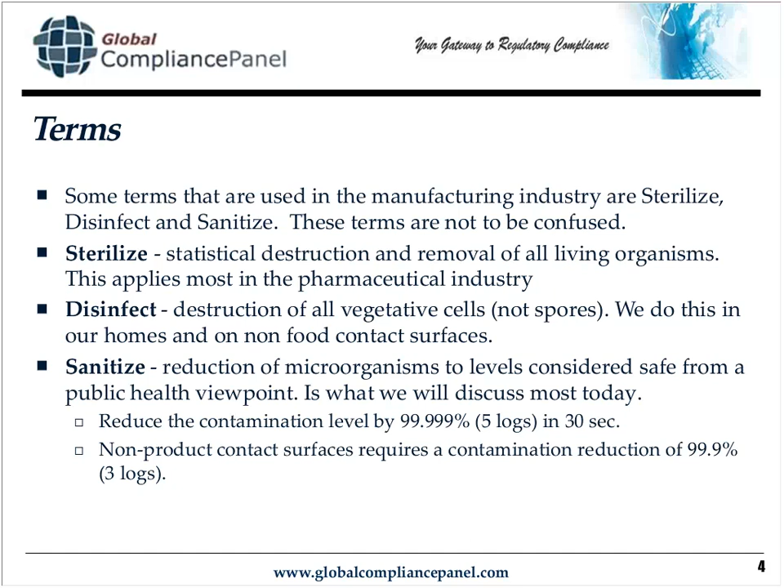Again, what we're looking to do with sanitation is to reduce microorganisms, not totally eliminate. That's not necessary, and it's actually not even helpful because most of the microorganisms that exist in the environment, as you know, are non-harmful and actually outcompete the harmful bacteria. So we want to keep some of those bacteria in the environment to outcompete and to prevent explosive growth of pathogens or potentially dangerous microorganisms, those that are involved in foodborne illnesses.

So now that we've defined sanitizing and sanitation, let's talk about that versus cleaning. Cleaning is closer to disinfecting, wherein what we're trying to do is on a food contact surface, we want to free it of bacteria that might contaminate products and ingredients, causing foodborne illness. But those areas that are just near the food contact structures, we want to also sanitize and clean so that they're not a source of contamination.

But non-food contact surfaces just need to be clean and free of buildup. So we don't want to have a biofilm or a layer of protein or starchy material that would harbor or cover bacteria such that when we go to clean, we can't actually reach them with our chemicals or water.

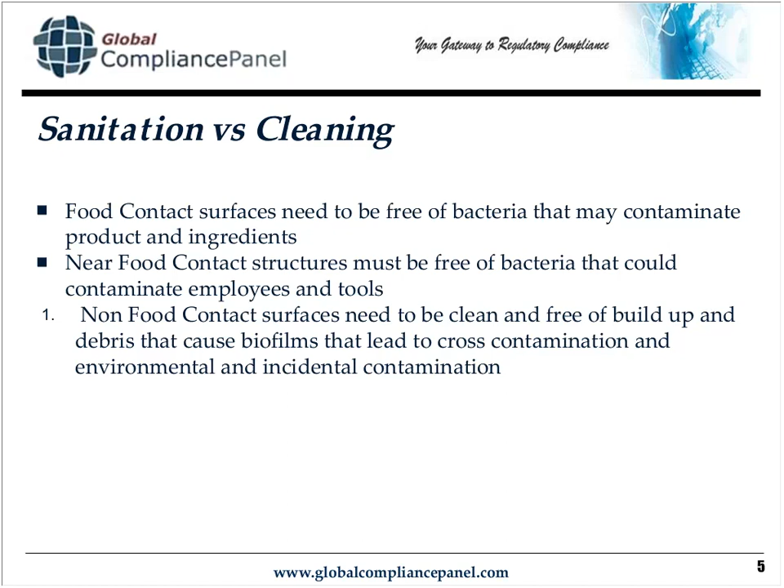Or we want to prevent any incidental contamination. And again, so what areas do we want to sanitize? Let's list them. They're going to be our food contact surfaces, like processing equipment that has direct contact with food, our tools, anything we're using like spatulas, scrapers, tongs, anything that moves the food or comes in contact with the product needs to be sanitized.

Near food contact surfaces, very important. Support equipment, nearby structures or shields. Say, for instance, if you have a Lexan viewing screen, overhead structures, refrigeration units. Say, for instance, if it's a spiral freezer or a refrigeration unit that's bringing down product temperatures, it's a cooling tunnel. All of this, including the HVAC systems or refrigeration systems that support it, and forced air used to convey product or used to blow off excess water.

All of this needs to be sanitized because it does, in fact, come in contact with the food either directly or indirectly, as in the employees who are working with the food come in contact with these structures. Say, for instance, you have inspectors on the line and they are pulling out defects of pieces of shrimp. They will touch these supporting structures and then touch the product.

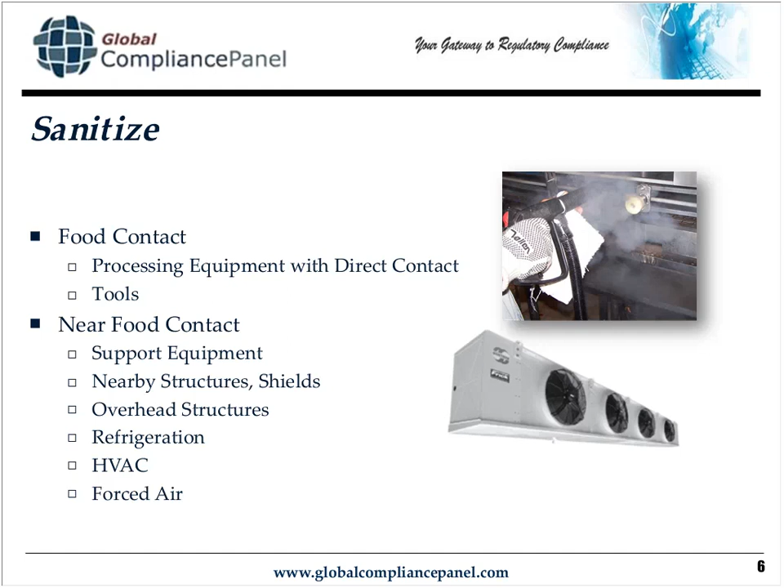Now, cleaning, on the other hand, is what we want to do with non-food contact surfaces, things where we have a reasonable level of control that neither employees who haven't cleaned or sanitized their hands nor the product itself will come in contact with. Walls, ceilings, drains, floors, racks, and cleaning equipment should never be in contact with food, so all we need to do with these items is to clean them.

Any food that does come in contact, conversely, with these systems or with these items needs to be discarded because, again, we haven't sanitized them, we've only cleaned them.

Additional areas where we're going to perform cleaning would be the break rooms, locker areas, office areas, and restrooms. Again, these are totally non-food contact areas, areas where employees, after going to these places, should wash, sanitize their hands, and perform whatever types of protective clothing changes need to happen in order to ensure that they're not bringing contaminants back into the food contact area.

So two-pronged there. Not only do we want to clean these areas, don't need to sanitize these areas, we also want to make sure that our program recognizes that these areas are cleaned and not sanitized, and therefore when we traverse between each of these areas back to the processing area, that we take protective measures to make sure we sanitize ourselves where we're going to be in contact with food, wearing gloves, washing hands, using sanitizer or hand dips.

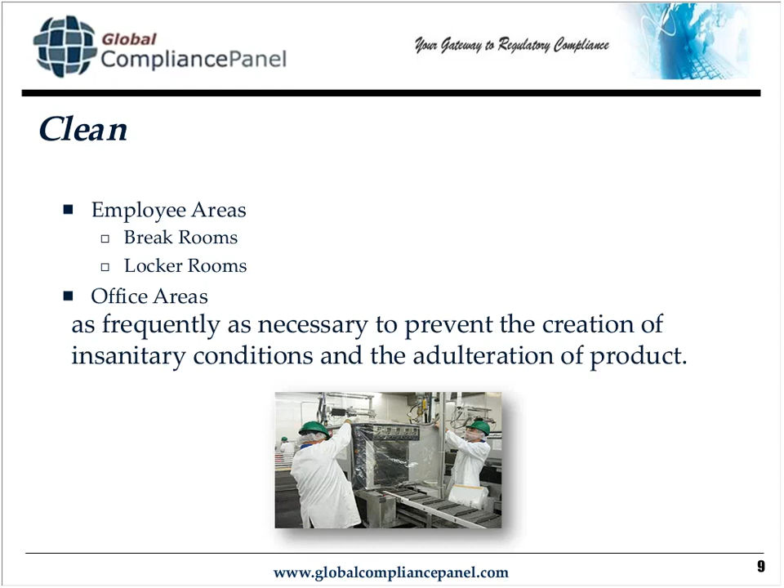Not only that, but foot dips, because as we walk through the facility, we don't want to bring any extra bacteria into the processing area that could potentially be splashed onto support structures. So now that we know the difference between sanitation and cleaning, let's talk about why we do these things in more detail.

The 9 CFR 416.1 of the general rules requires that we have sanitary operations. All food contact surfaces, including food contact surfaces of utensils and equipment, must be cleaned and sanitized as frequently as necessary to prevent the creation of unsanitary conditions and the adulteration of product.

Purposely, this is very broad and general. What is intended by the Code of Federal Regulations, or CFR, is that each facility or operation take responsibility for keeping their product safe. So all food contact surfaces is the statement here, as well as preventing the creation of unsanitary conditions.

So here you notice it hasn't mentioned that anything has been contaminated. It just says that the condition for an insanitary environment should not even be created. So here there's a very broad regulation to make sure that this facility itself is taking ownership of maintaining proper conditions.

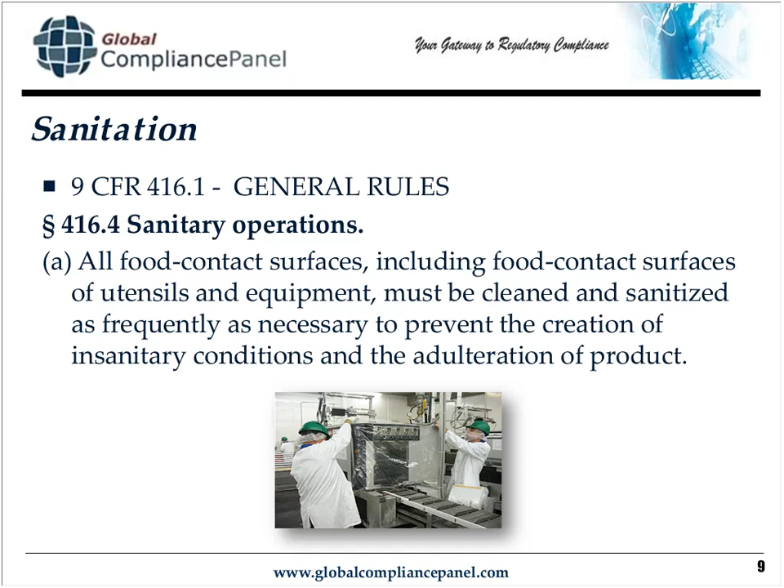What are we talking about in terms of food contact surfaces? Let's review. We're talking hand sinks, pans, utensils and tools, so scoops, spatulas, anything used to move products around within the process, also equipment. You'll see here in the picture that we even have forklifts and bags of product.

Keep those things in mind too as you're working and looking at your sanitation program, that anything that comes in contact with food or the people that come in contact with food, there needs to be a program or a plan in place in order to prevent that cross-contamination. In this particular example, separating the people who deliver the product to the mixing area or the processing area from the people who actually handle the product is the best practice.

I also recommend that pallets, as you can see in this picture, there is actually a wooden pallet being delivered to the deck where product is going to be mixed. That's definitely not a best practice because those pallets have traveled, as you know, through many different environments.

And unless they're dedicated just to product which is brought to this mezzanine or mixing area, they have been in contact with animals and pests and dirt and different transport equipment, as well as people who are not food handlers. So there's a lot of potential for contamination involved with pallets and shrink wrap and overwrap that's being delivered to this mixing area, as well as the hand jacks themselves are being handled by warehouse employees who are not direct food contact handlers.

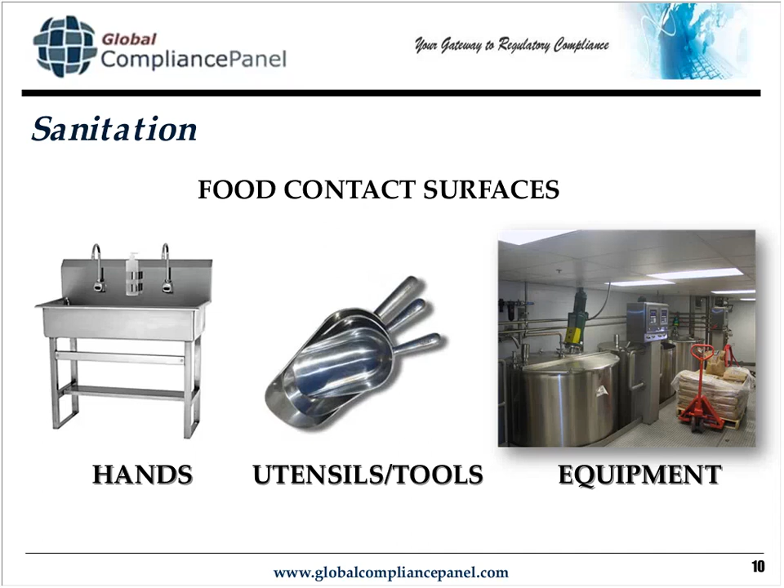Going back to food contact surface cleaning and sanitation, we talked about the Code of Federal Regulations and its definition of the program needing to have sanitation occur as frequently as necessary. A good rule is every 4 hours because we know that the bacterial life cycle is 4 hours. And if we are able to clean, say, mid-shift, end of shift, routinely, then we know that we have a good program in place that would be defensible in any situation to combat bacterial growth.

If you're working with non-potentially hazardous foods, dry goods, or acidified foods, or things that are shelf-stable, then it's not as critical. But anytime you're working with meats and produce and potentially hazardous foods, it's really important that there be mid-shift cleanups where we are able to remove product that has accumulated during the processing so that it's not growing and harboring bacteria and imparting that onto the surfaces of the equipment itself.

Another tactic to use is maintaining the room temperature below 40 degrees. This is often used in the protein meat industry as a control so that any time that there is product exposed or product stored, the room temperature is maintained at a refrigerated temperature so that any product which is in that area will continue to be maintained at less than 40 degrees, or below the bacterial growth threshold.

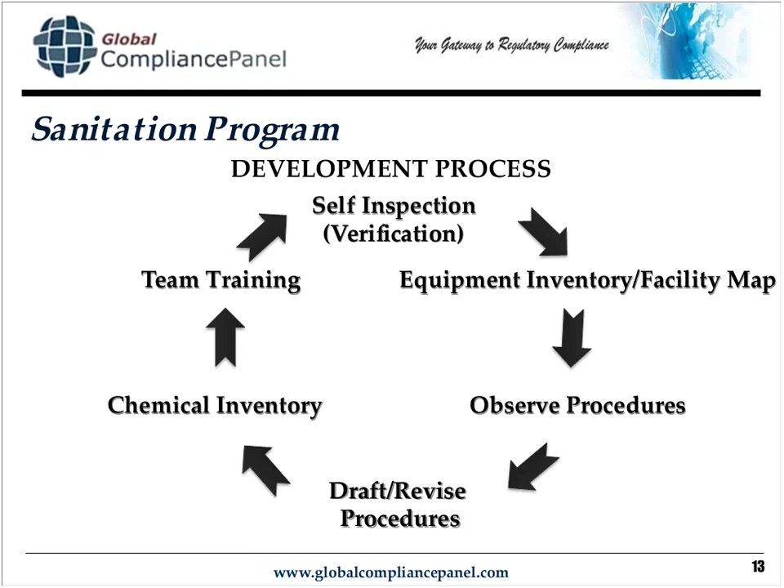And what would that documentation look like? Here is an example. We always want to use document control and demonstrate that by our header tables that kind of give an overview of what's involved in the plan. So we're going to define the area being addressed. We're going to have a checklist of each task being completed.

We want to make sure we include accountability and include a step for verification. So someone who is a supervisor is going to sign off that not only has the documentation been completed accurately, but the procedures have been effectively completed.

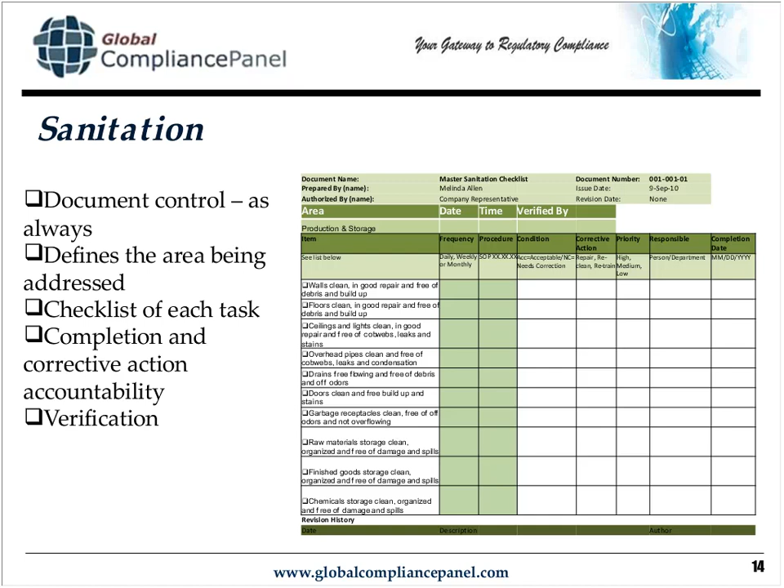Within those procedures, sanitation is always going to have the same 5 steps. You're going to remove any debris, product residue, anything, equipment that is loose or portable. You're going to apply cleaning chemicals, scrub surfaces so that, again, we remove any biofilms or hang up areas where there is residual product. We're going to rinse away both the cleaning chemical and any of the loosened materials, and then finally apply our sanitizer.

Keeping in mind that after the sanitizer, there is no rinse step. We want the sanitizer to remain on the equipment to continue the bacterial kill. And we will talk as we go through about how we prevent any chemical contamination with that as our process. Why don't we want to rinse the sanitizer away? Because remember, our water supply, while it is potable or safe for eating, it is not sanitized. Our water supply is not free of bacteria. And if you rinse away your sanitizer, you're removing your protective chemical and possibly introducing other bacteria.

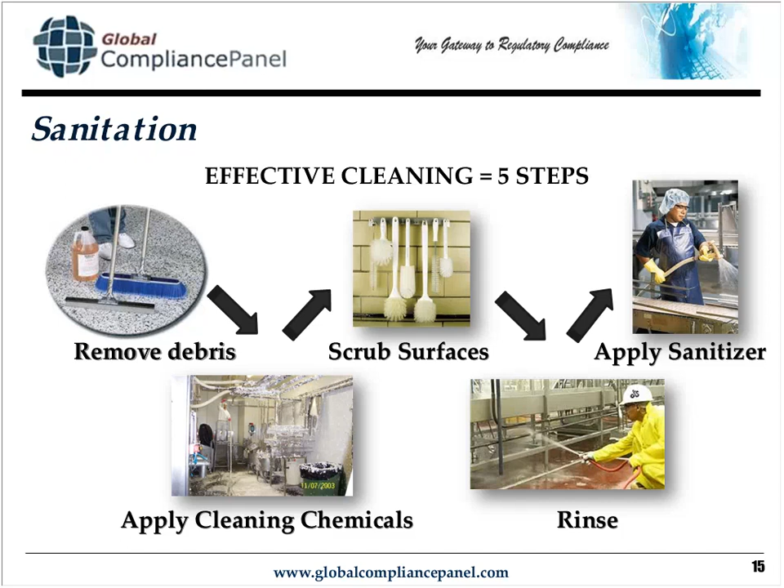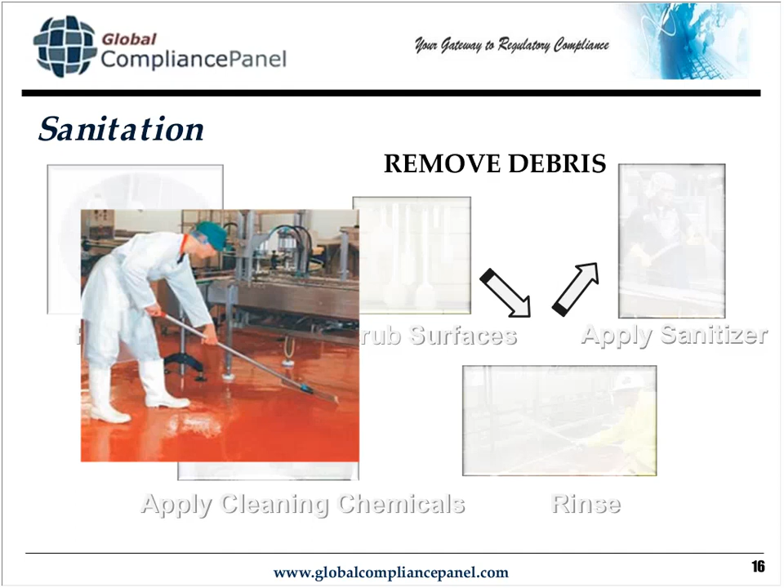So this is just walking us through the process. Again, this is more important than most of what we'll talk about, just making sure that we get all these steps included and in the proper order and done in detail and effectively. So removing any debris, because again, we can't clean if we have residual biofilms and debris or product residues. Applying the cleaning chemicals, and as you can see, plastic covers over, of course, our control panels or any exposed electrical equipment.

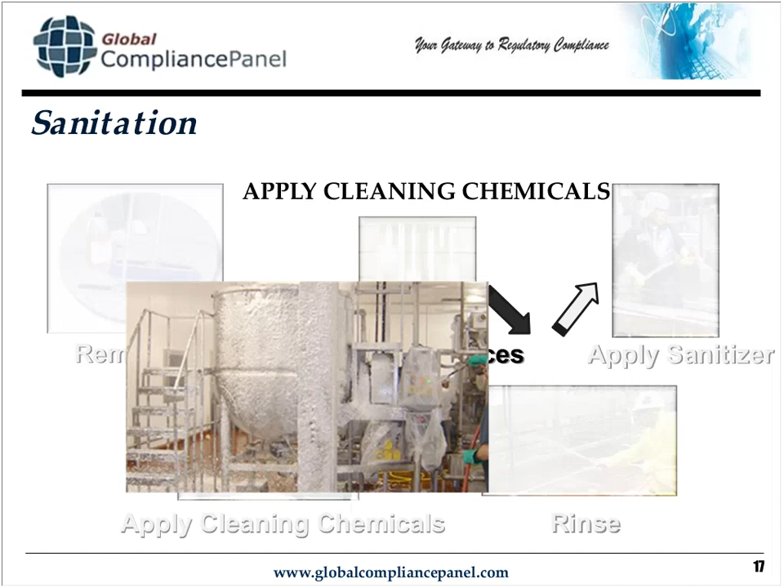And you also see how the support structures, such as the stairway, the stands that the mixers are sitting on, everything is receiving cleaning chemical. We start from the top. We apply in a downward motion so that any debris or everything that we're trying to eliminate is moving towards the floor. And then we start with our scrubbing. So now we want to make sure that the cleaning chemicals are in contact with all the surfaces and that our, again, residues are being removed. Just spraying on the cleaning chemicals is not necessarily going to allow us to remove the buildups that have accumulated during the processing. And we'll talk more in detail about what types of ingredients are more stubborn and require more of this scrubbing.

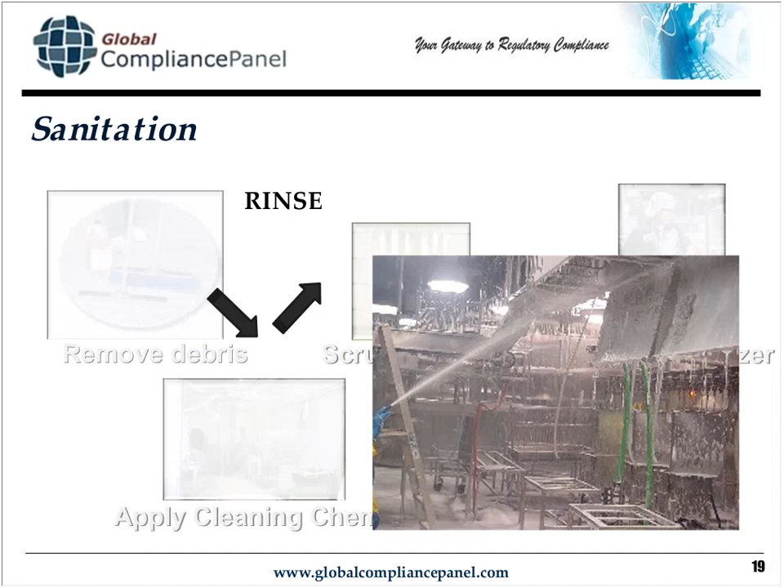Then we have our rinse step, same as our application of cleaning chemicals. We're going to start from the top and move our way down so that everything moves towards the floors and drains. And finally, we apply the sanitizer to clean and rinsed surfaces. Always remember that you cannot sanitize a dirty surface because there will be a biofilm that will trap bacteria underneath, wherein the sanitizer won't actually be able to contact the surface of the equipment. And bacteria will continue to grow underneath that biofilm until it is exposed again to the product contact surface.

Now let's focus on cleaning. So we've got all the equipment, food contact surfaces sanitized, but we also have all those peripheral structures that we talked about earlier. Now this type of cleaning we would want to do before we sanitize, but typically needs to happen less often than sanitation. Sanitation is going to happen every time we run products, again, because this is most critical and it is the law. Cleaning all the other non-contact surfaces, usually there's less, we're not having products contact these surfaces, so it's less likely that they're going to get built up in dirt.

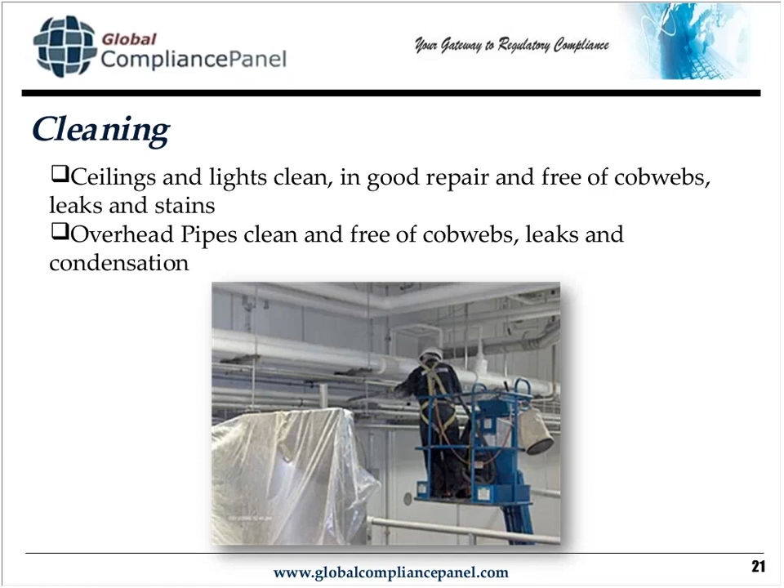Then moving to the floors, the same, they should be clean and in good repair, also free of debris and buildup. And drains being free-flowing and free of debris and odors. Working backwards there, the odor is the indicator that we have some bacterial spoilage going on and that there is debris building up in the drains and that they're clogged in some way, that the debris is not flowing out towards our waste management.

That also prevents us from keeping our floors free of buildup and debris, which a regular program of sweeping, squeegee, et cetera, needs to be employed, even during production, because we don't want to wait, especially if you're running 2 shifts, you don't want to wait until 16 hours later. Again, that's a lot of time for bacteria to build up as well as food debris, such that it makes the cleaning job a lot more difficult.

Which brings me to a really good segue that we want to always be sure that the program is at its optimum for the team to execute the procedures. So, for instance, we all know that anything in life, if it's difficult to do, it's not going to be done properly. We want to make it as easy for the team as possible. So oftentimes that means doing it more frequently so that it's an easier, smaller job than, again, waiting to the end when it becomes just overwhelming for the team member or beyond the scope of the time period that they have allotted to doing that task.

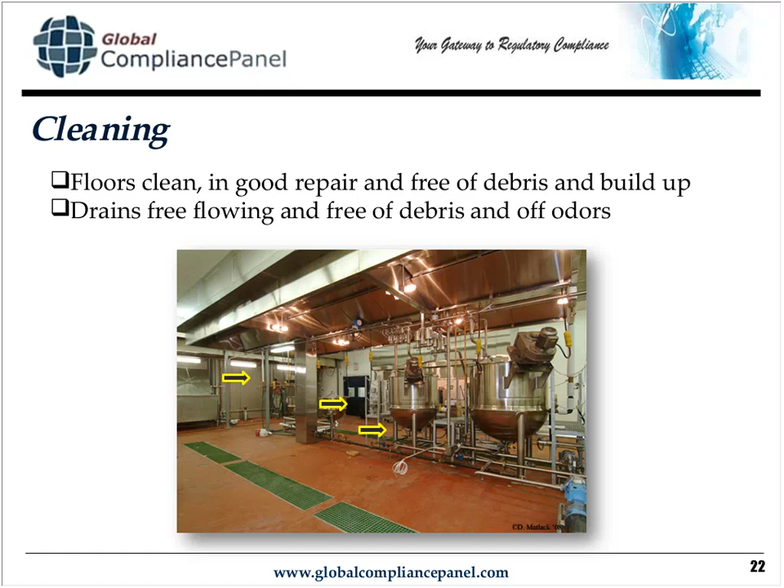And finally, floors being in good repair, same reason as for the ceilings. Anytime you have crevices, cracks, and divots in the material, it makes a good harborage point for the bacteria and makes a lot more uneven surface for our cleaning chemicals to act on, and you'll see what I mean as we go into the cleaning chemical effectiveness portion of the presentation.

Let's not forget our production and storage areas, that we want to include the walls. Walls tend to get a lot of contact and buildup, not only from our hands and the product that incidentally contacts it, but also we want to make sure that there's no insect activity going on the walls. I've even seen lizards run up the wall and leave excreta. So it's really important that we keep the walls clean and on the cleaning schedule. I know we put it on there sometimes and it doesn't actually get accomplished, but frequent cleaning and painting will keep that surface free of any potential contamination.

Again, it is a vector as opposed to a food contact surface. So how many times do we bump into the wall or touch the wall as we're moving through the plant and bring any contaminants thereon into other areas where they shouldn't be? Even more critical than the walls are the doors, because as you know, they get frequent contact. And anytime you're seeing those smudges on the doorway as well as on the door handles or door plates, you know that the cleaning program just is not effective. Those smudges are going to happen and they need to be a very integral part of the cleaning procedures.

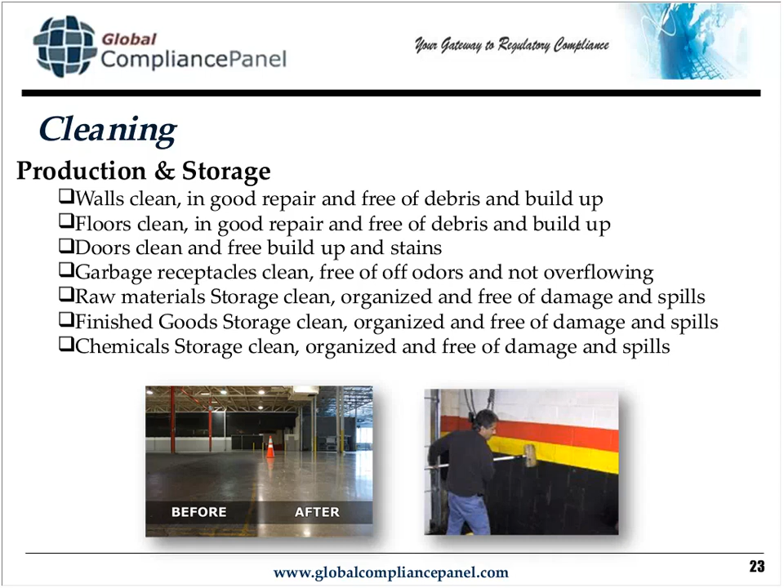Our final areas are the employee office and maintenance. Again, this is where we're trying to get to that last and most important vector, which is ourselves. So we want to make sure the areas that we work in or our office teams work in are clean and in good repair, free of debris and buildup, so that we're not a source of contamination as we move in and out of the production area or storage areas for whatever reason. Same thing with the walls, floors, ceilings, any overhead pipes and doors. We want them to be in good repair and free of cobwebs, leaks, and stains, as well as condensation and, again, buildup.

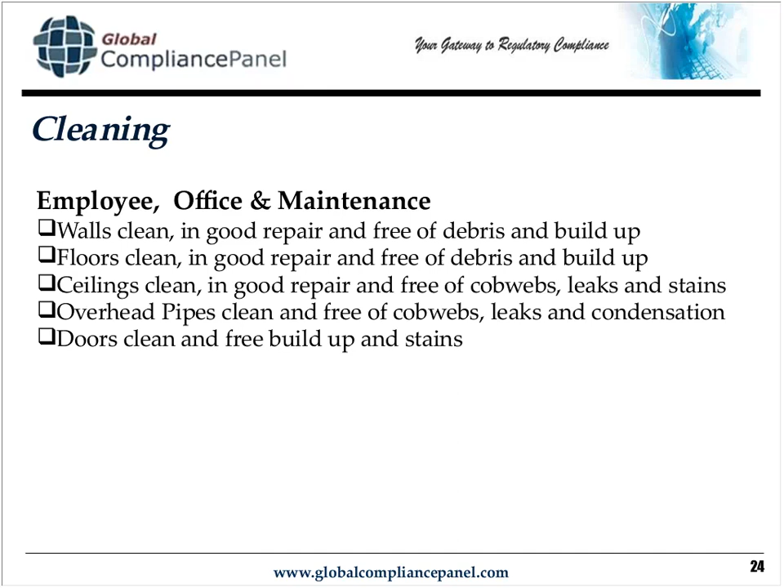One of the key areas I want to mention about the office area is computers and keyboards, mice, or any type of equipment or things that we handle on a regular basis, chairs, because again, our hands are the primary vectors for conveying microorganisms, so we want to have those on a regular routine cleaning schedule.

Exterior and grounds are also a good attractant; it's our first vein of attraction for pests, so we want to make sure that they are clean and in good repair. Any drainage prevents standing water or stagnant water from harboring or breeding insects and bacteria. Doors sealed and locked, just so that we control the flow of traffic in and out of the facility. Grounds are free of weeds, pests, harborage, and debris. For the same reasons as mentioned above, we want to make sure that there's not an attractant or harborage area for pests.

Equipment is stored away from the building or organized for inspection. That's another place where we might get rodents or insects to breed, and especially garbage receptacles. Our dumpster area, recycling, all of that needs to be, first of all, cleaned on a regular basis, and second of all, covered, so that birds aren't attracted to not only feed, but then to leave droppings, as they all do.

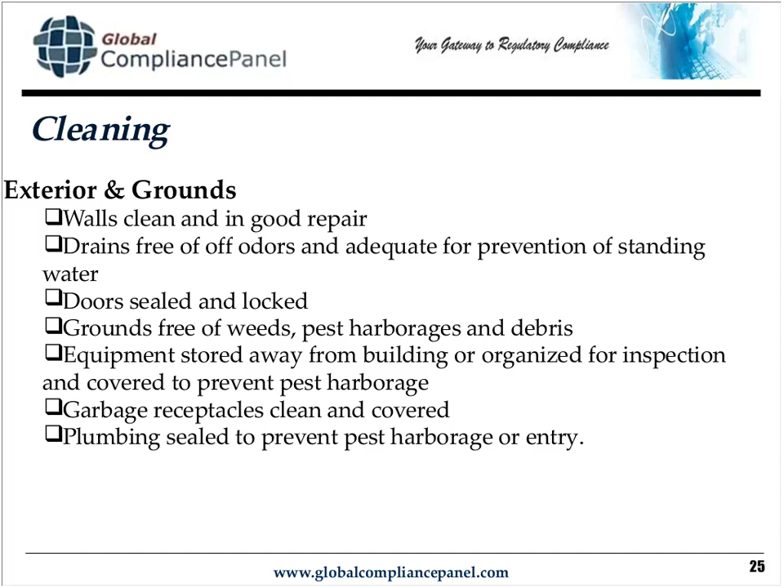And finally, plumbing. We're looking for it to be sealed or at least screened, so that pests that are on the outside of the facility stay there and don't enter in through our plumbing. Any holes in the structure of the building that allow pipes to enter, we want to make sure they're sealed, because they are a good transport valve for rodents and insects. They feel the warmth, they are attracted to the water, and they do what we call chase pipes from the outside and into the facility. So we want those sealed on the outside as well as sealed on the inside.

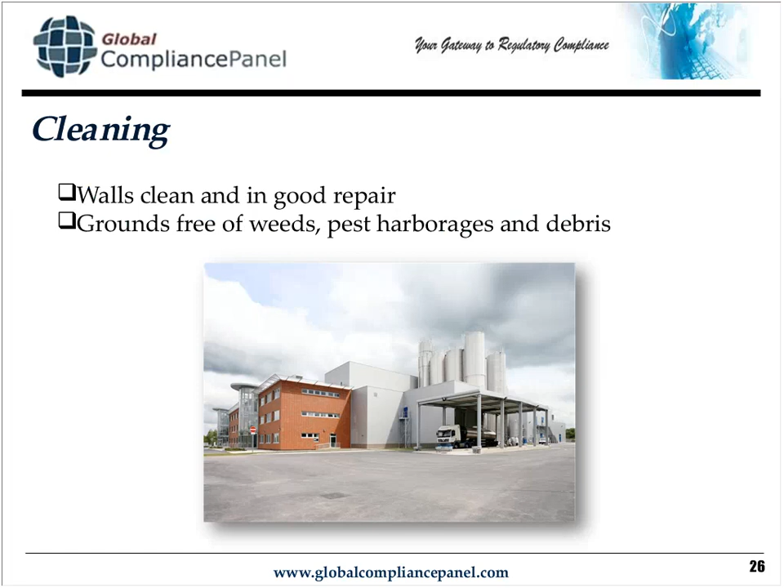And we talked about the external walls of the facility being clean and in good repair, as well as the grounds being free of weeds, pest harborage, and debris. A really critical area is our dock, because of all the truck traffic and the potential for product spills and the attraction of birds and other pests to that area. This needs to be on a more frequent cleaning schedule, potentially, than other areas of the plant.

Another area I want to mention is if there's external picnic or eating areas. That's another area where we could potentially have food that may be left around or wrappers that might attract pests. So again, keeping our cleaning schedule up to date so that it's effective may mean having a different schedule for different areas of the outside. So keep that in mind when you're doing your sanitation program or your cleaning program. Housekeeping is another name for it.

Here's a picture of a good-looking dumpster area, nice and clean and covered. Whenever they come to pick up the dumpster, the pad underneath is cleaned and repaired. And this is what we want our area to look like, such that it doesn't attract pests.

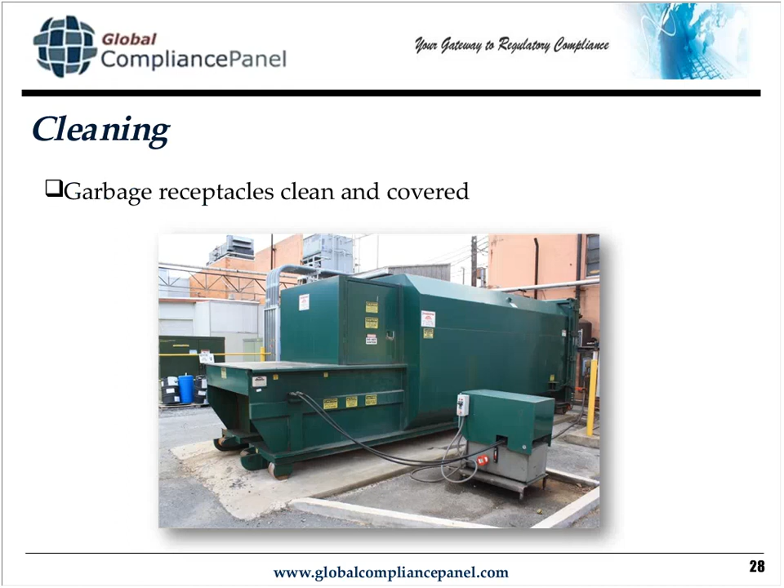Our warehouse area should be free of pallet splinters, food spills, mud tracks from the potentially wet processing area and out into the warehouse or refrigeration, cooling, whatever type of product storage area that we have. I see a lot of facilities that will have forklifts tracking water throughout the facility with a lot of dirt and potentially bacteria in it.

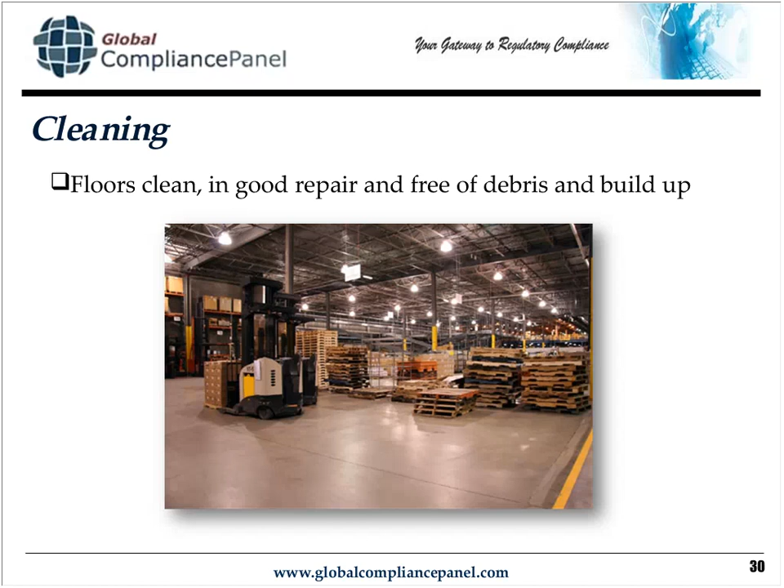We want to keep the ceilings clean, especially in the warehouse area. A lot of times, the ceilings as well as second layers of pallets and storage will drop debris down onto the top of ingredient and product, which then we know goes directly into the manufacturing area to be a source of contamination. So cleaning from the top down and making sure that there's not cobwebs, leak stains, debris will keep our food ingredient integrity intact.

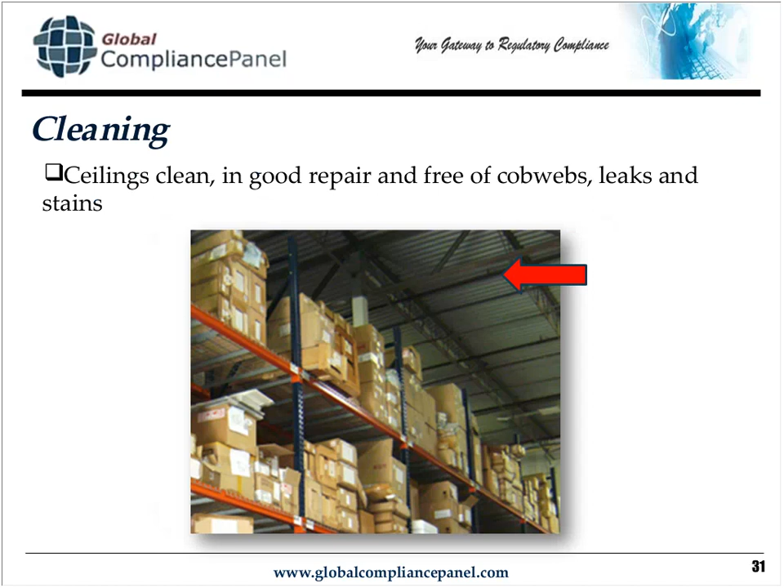Overhead pipes being a part of the ceiling. You know, you often get that buildup of dust and debris on the top of the pipes. Well, we know that if there's buildup here on top of the pipes, then the rest of that buildup went through the pipes and onto the surface of something.

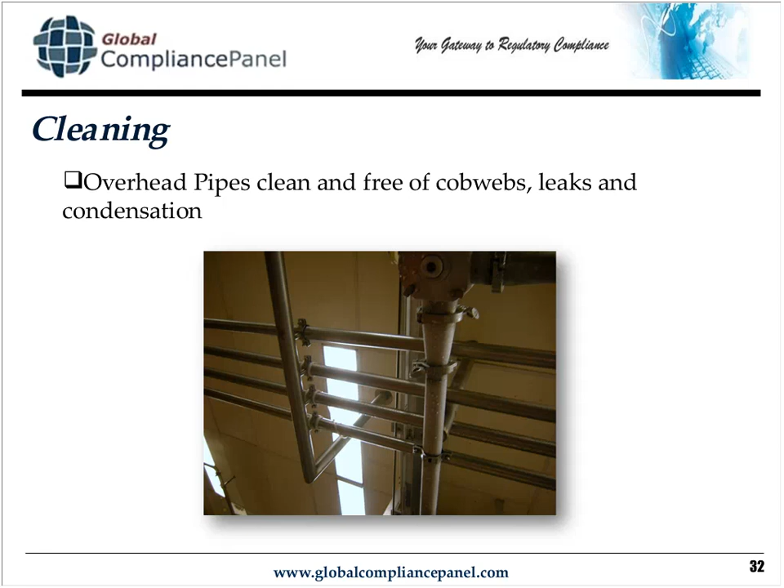So let's keep in mind air quality handling systems as well. We won't talk about those in detail. That's probably a topic for another presentation. But those should be maintained, as we mentioned earlier, in the best condition to prevent contamination of surfaces from debris in the air.

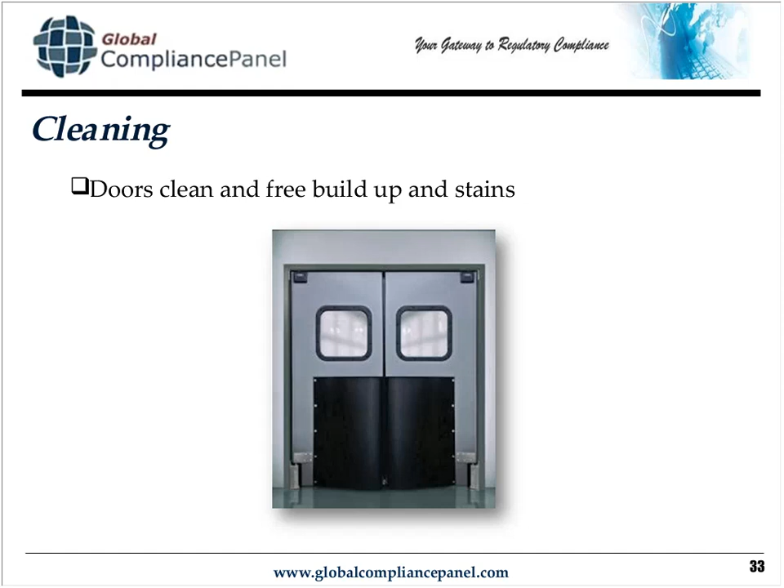Doors. Can't emphasize enough the amount of activity. You know, most doors, they don't look this good. Any type of bumpers and plates or views, windows, usually full of handprints and buildup. Again, we want to prevent that because that indicates contact, which eventually transfers to our product.

So how do we get there? Our most important asset is our chemicals. And what does the Code of Federal Regulations say about chemicals? It says cleaning compounds, sanitizing agents, processing aids, and other chemicals used by an establishment must be safe and effective under the conditions of use. So safe meaning they are the proper chemicals, and effective meaning they work.

They do the job. Such chemicals must be used, handled, and stored in a manner that will not adulterate product or create insanitary conditions. So that goes to keeping the area clean and free of spills that would adulterate the product or create unsanitary conditions.

And finally, documentation substantiating the safety of a chemical's use in a food processing environment must be available to FSIS inspection program employees for review, and you can substitute there any type of inspector or auditor that you will have in your facility. FSIS would apply to primarily the meat industry.

So what does this documentation look like? Material safety data sheets, as well as your cleaning procedures. The two should match up. So there really should be your cleaning chemicals. Anything you see in the storage area should have a material safety data sheet. It should be on a list of approved chemicals, which should correspond to your procedures.

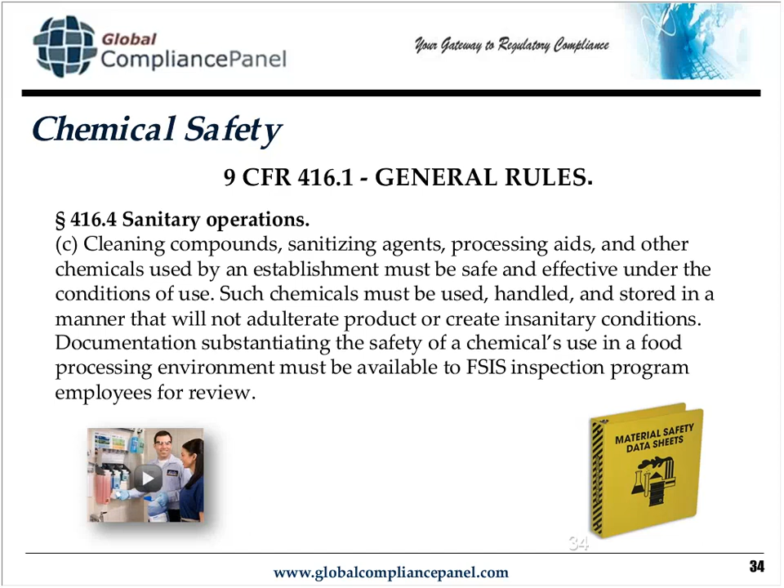The types of chemical dispensing methods that are often used in manufacturing are either manual or automated. So manual meaning that you would have a scoop or a cup or some type of a pump dispenser, and you'd have to mix the chemicals yourself. That requires daily concentration verification to ensure that we're not exceeding the concentration levels that are deemed safe in the environment being used.

And this method tends to be more susceptible to human error because each time there's a potential that it won't be done properly. Training is very critical. Compliance to the training is very critical.

On the other hand, we have the automated systems where we only need to calibrate monthly because they are predefined or calibrated to deliver the same quantities each and every time. But it's more difficult to detect errors because we would assume that they're correct and we're not revising the system. We could go on for long periods of time without knowing that our delivery systems are inaccurate. So again, we want to make sure that they're checked and calibrated monthly.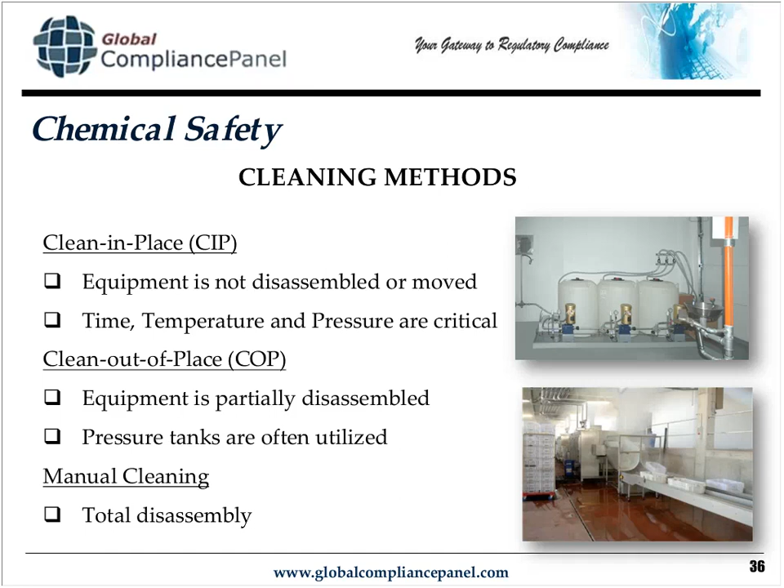So each one of our procedures needs to specify what type of disassembly, and if there isn't disassembly, what type of time, temperature, and pressure needs to be involved in order to ensure an effective clean and sanitation. How we implement the system could vary between internally managed versus external.

Internal would involve company employees who are familiar with the operations, so they would know where the hang-up spots are, and we would be responsible for our own training in that event, or an external company which would have its own third-party employees, or perhaps they train our employees. But they would have focused expertise on the chemicals and types of substrates to be removed, and would typically provide documentation on the chemicals and procedures being used.

So that's just a decision that the company will have to make in terms of what their resource levels and expertise needs and availability are, whether or not you go with an internal versus an external chemical company. But keep in mind, again, the company is ultimately responsible and needs to review not only the performance of an external company, same as they would their own employees, but also needs to review and ensure the documentation is accurate and applicable to that environment.

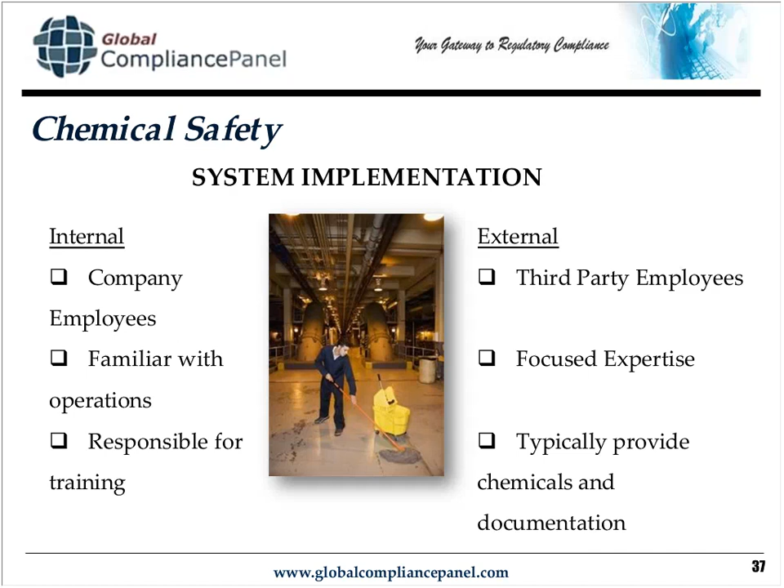Sometimes they do a generic manual and it will have procedures in it that don't actually apply to your operation, and again indicates that there's not really correct and accurate documentation of the systems, that it's just paperwork that's been generated and not being used. So we don't want that to be the case.

So an annual review with the company to ensure everything is up to date, or as often as changes are made. Sometimes they will contract with a new chemical company, I see this more often than anything, and change out all the chemical names, and they won't match up to what's in storage, may or may not match up to the MSDS, and definitely won't match up to the procedures.

So when we talk chemical safety, what we wanted to get down to is these tables I wanted to just put in your possession for your access. So as you're developing your program, you have a guide, especially if you're not going with an experienced third-party chemical provider and you're developing your own programs. You need this guide to know what types of cleaners you need to use to, again, be effective and make the job easier. If you're using the wrong cleaner, it's going to be slow, difficult, and possibly never work.

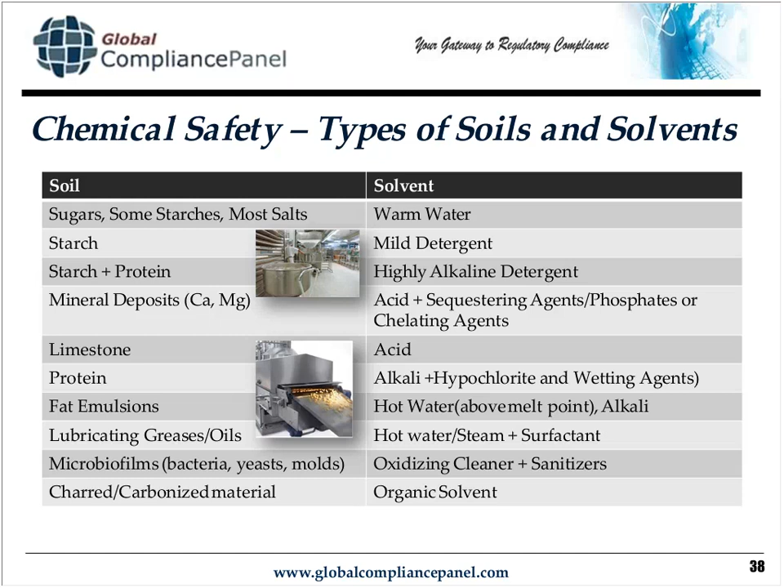Definition of some of the additives that go into the cleaning chemicals. We talked about having a sequestering agent, which is the same as a chelating agent. Examples of this that you'll see on the labels of the chemicals that you'll procure will be tripolyphosphate, tetrapotassium pyrophosphate, organophosphates, and polyelectrolytes.

So don't be intimidated or ignore these names. Know that these are your friends. You want these to be added to your chemicals to make them more effective at binding and removing some of the substrates that you encounter in your process.

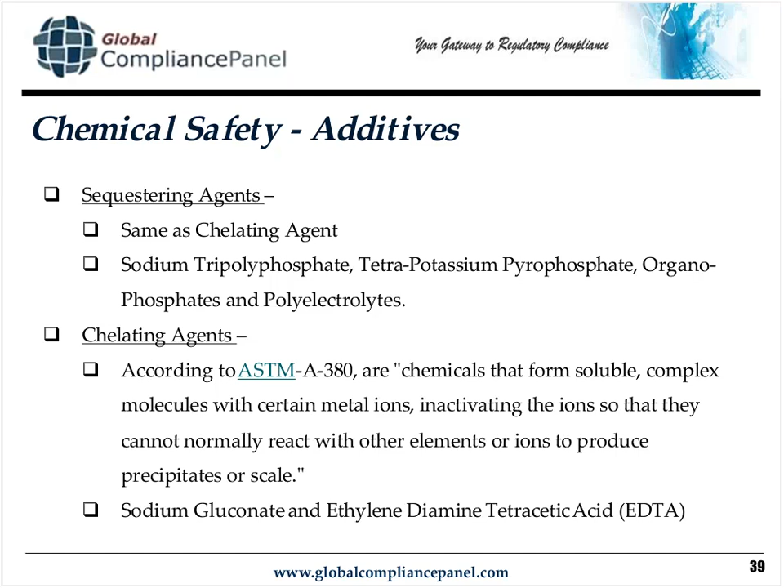I know that we're running short on time, so I'm going to get through this very quickly. Chelating agents, again, form compounds or complexes with the metal ions that are left behind by our hard water, so they can't produce a precipitate or scale. And we want to make sure we have, again, the right combination of ingredients to act on the substrates that are in our environment.

Additional additives include oxidizing agents, enzymes, and fillers. Oxidizing agents and enzymes are active and will actually, again, bind to substrates and help to remove them from the surface. And then fillers are just bulking agents that allow us to spread a small amount of chemical across a large surface.

Choosing the sanitizer that's best in a variety of environments is usually where you want to go, because knowing exactly what type of bacteria you're dealing with is unlikely. Unless you've done a swab test and found out that you've got a particular bacteria that you're fighting and you need to go with the chlorine or iodophor or quat cleaner, you just want to choose one that's generally good for everything and specify if you have a problem.

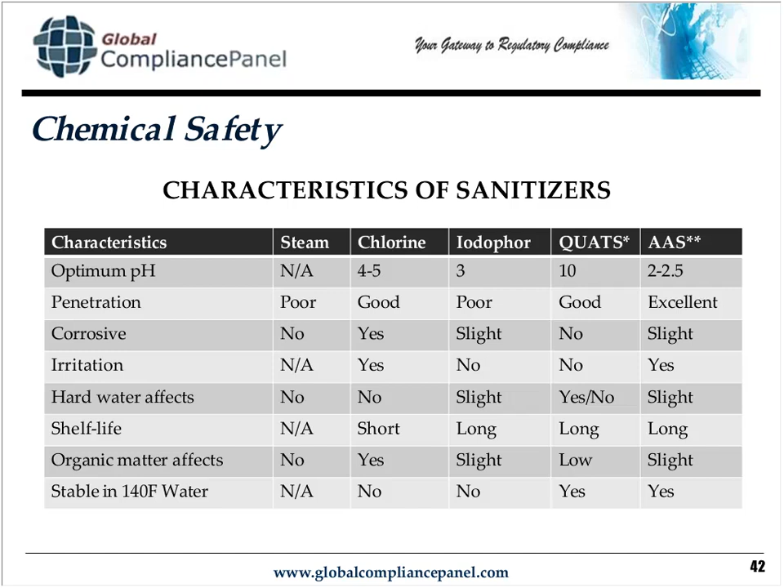So you just want to know if the chemical you're looking to use is going to be a potential risk and needs to have protective gear involved or protective information conveyed to your employees on how to protect their safety. Whether it's stable in hot water, that's important if you're using hot water as a cleaner. Whether it leaves a residue, has any flavor or odor impact like chlorines and iodine.

And let's see, if there is a maximum concentration that we talked about earlier, it needs to be employed. That needs to be tested on a regular basis and confirmed, because it could be a potential chemical contamination. Whether it's expensive or not will affect your bottom line, so you'll make some decisions based on that.

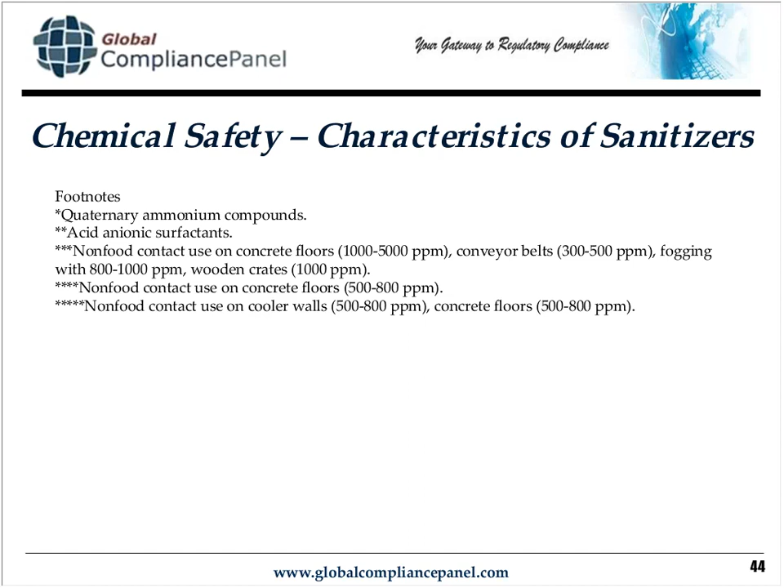And finally, where it's approved for use, it is important to keep it in your approved chemicals list, so that for any employee referencing that product, you have a liability control there. And this is just a little additional information with regard to concentration that you can review if any of these chemicals tend to be in your arsenal. More detail on each chemical, specifically chlorine, because it tends to be the most used in the food industry.

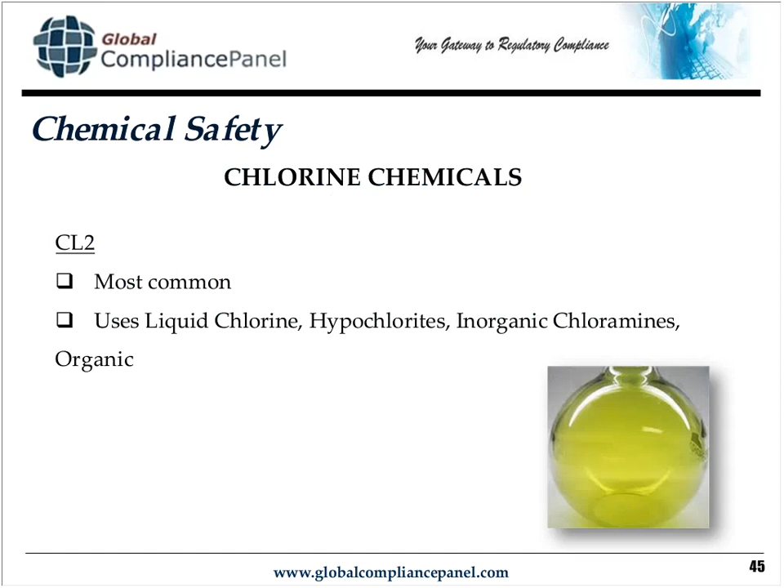It's effective at low temperatures, which is good. It keeps your energy costs low. It's inexpensive, leaves minimal residue. It is corrosive, especially at high temperatures, so especially on your stainless steel equipment, you can get a lot of rust or corrosion. It's irritating to the skin, so you want to make sure you're always using gloves and protective gear.

It can be deadly when the pH drops, so you don't want to mix it with other chemicals. It can even create mustard gas, which is highly, highly toxic, and under some conditions forms potentially carcinogenic trihalomethanes. So chlorine is not to be played with.

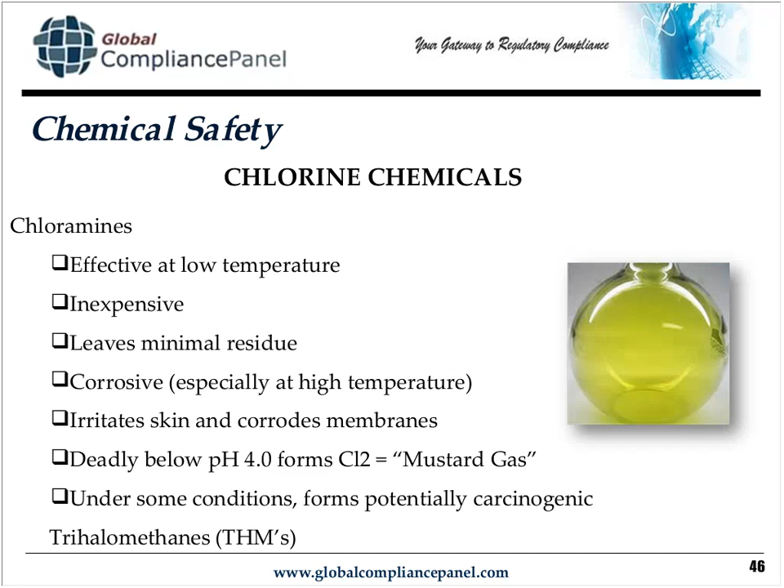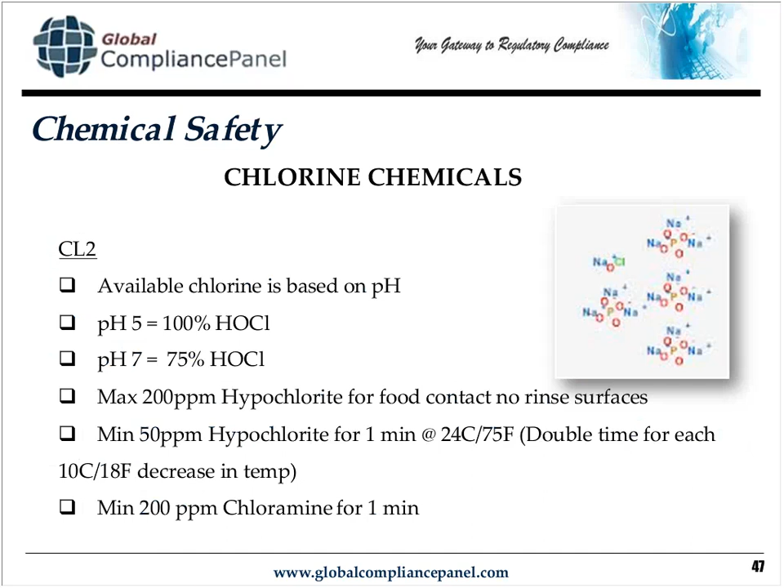I mean, we use it quite often and extensively, but we do need to keep in mind that it is a dangerous chemical and needs to be used in the proper manner. And then this just gets into the chemistry of how it works, how it breaks down into the different types of substances that bind to the materials we're removing.

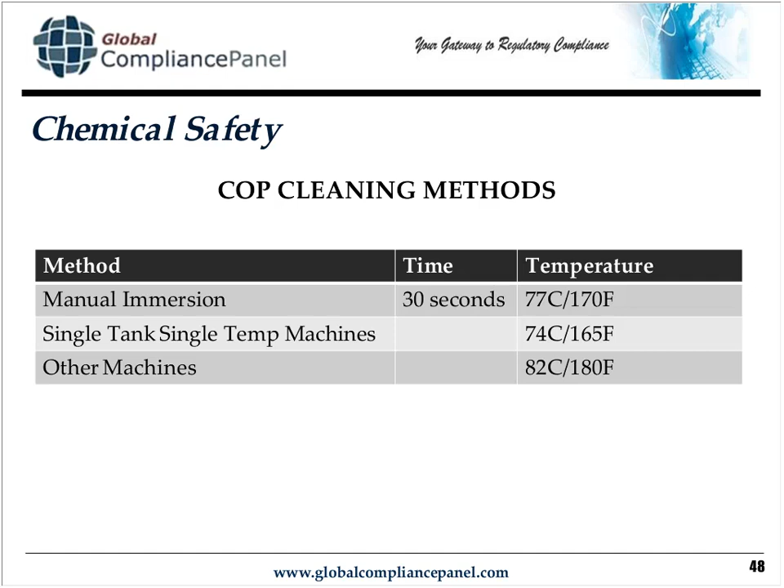Here's a time temperature chart for your COP cleaning tank. So if you're doing the COP operation where you partially disassemble some of the equipment, if you're going to use moderate temperature water, you need to leave it in there for 30 seconds. If you have control over the temperature and are able to optimize it, then you can do a single dip and move the process along more quickly.

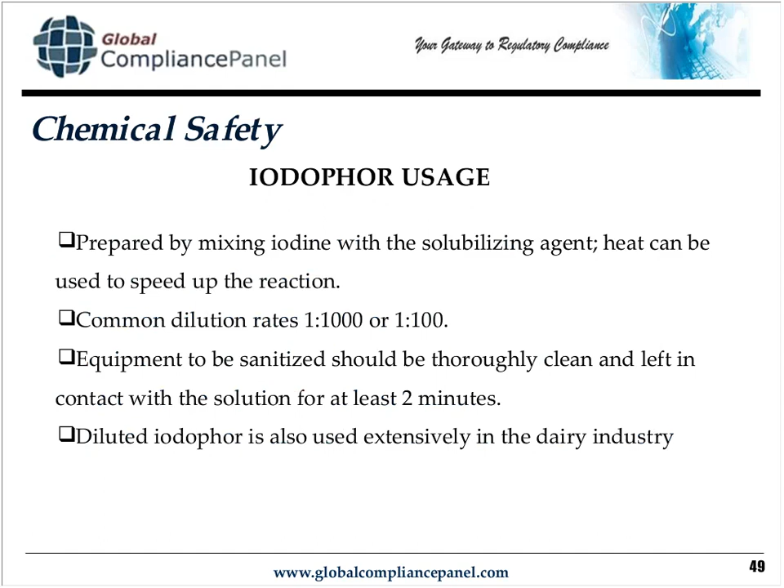Using iodine, a lot of times facilities will rotate the types of cleaning chemicals so as not to create resistant bacteria. And so there's some information here about iodine. I'm not going to get into this in too much detail because it is pretty infrequently used. A lot of times it's used for hand dips, but not so often used in a chemical sanitation program.

Mostly because it does leave an unattractive orange-brown stain on plastics, which makes them look like they are unclean. It's not very cheap either. And it's very dependent on temperature. So if your water gets low in temp, it is less effective. And if your water has a lot of mineral deposits, it's a lot less effective.

It's toxic, but very, very effective on bacteria. So in the event that you have some stubborn or resistant bacteria, you may need to go that route, at least temporarily, to get rid of some of those buildups.

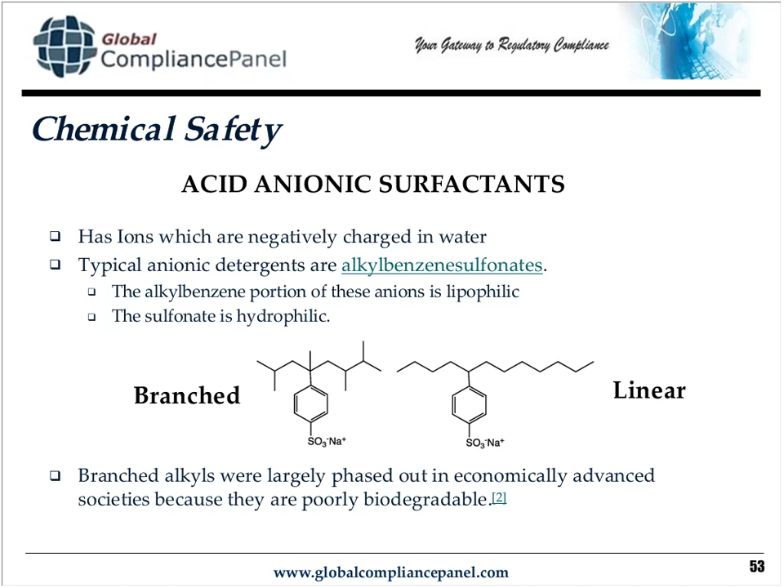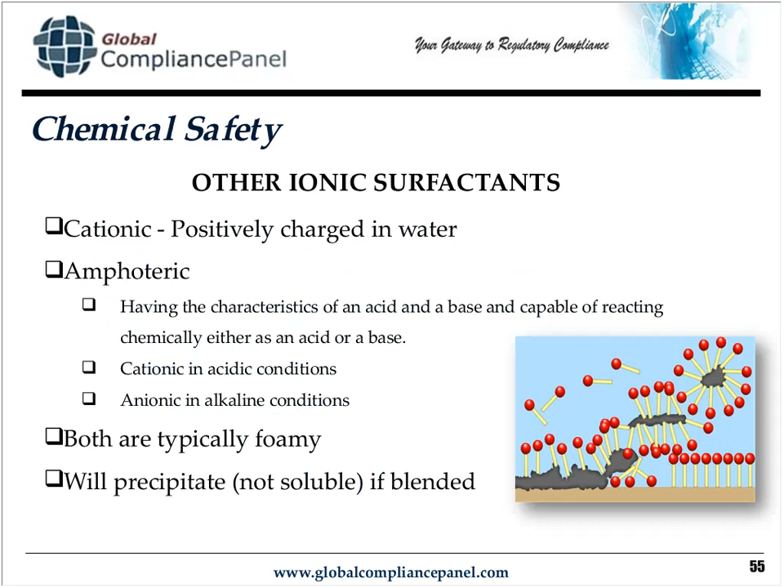Acid is even more corrosive and requires much more control and safety than even iodines, but is the most effective. So again, you want to make sure that if you have a stubborn situation and need to use that, you take all required precautions. This is more detail about additional cleaning chemical and sanitation chemical options.

Peroxide, we didn't spend too much time on this because we don't use it very much in the food manufacturing industry, but it is also an effective sanitizer as well as cleaner. Peroxyacetic acid is probably the most often used acid, especially in the produce industry. It's also moving into the meat industry. So we have some of the usage elements here for your reference. It does have a pungent odor.

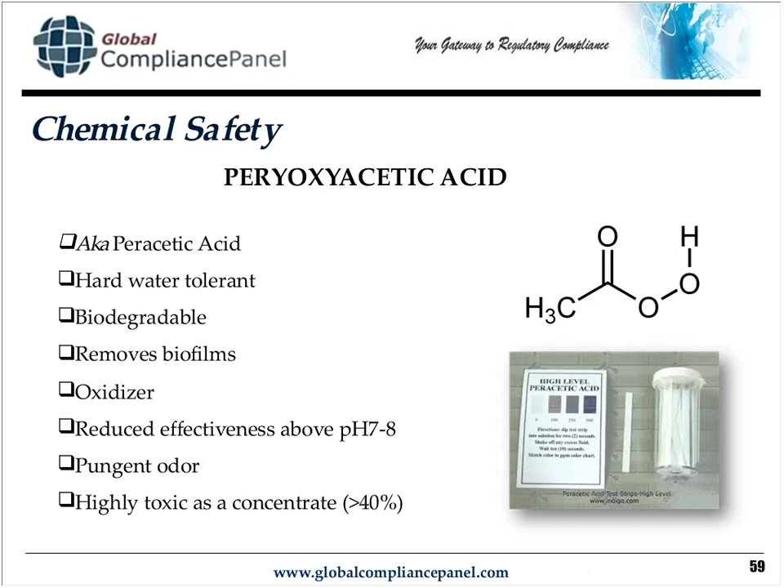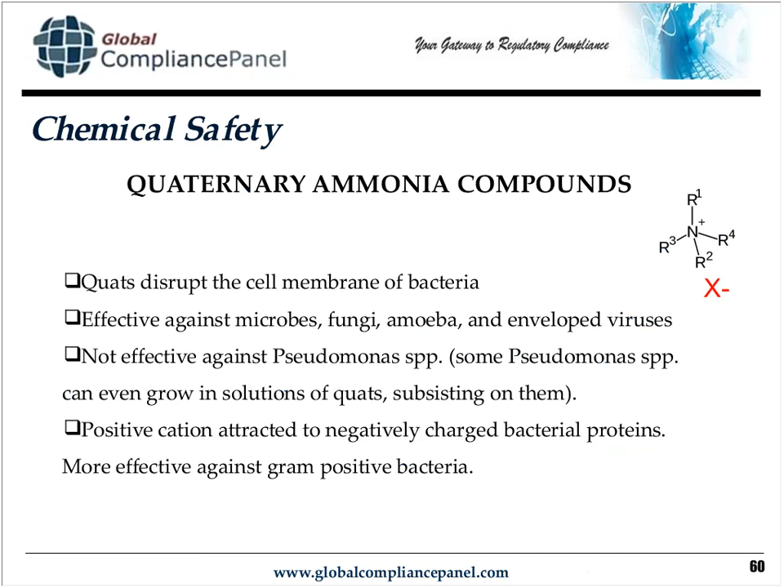We talked about quats, and this is talking about how they actually interact with the bacteria to break up the cell membrane and kill. But keep in mind that a lot of people will have skin sensitivities to quaternary ammonium. So they should not really be used as a non-glove hand dip.

And finally, chemical safety. In the storage area, chemicals need to be kept in a secured area with proper labeling, including the name, date or expiration date, and manufacturer. Spill containment, such as spill containment pallets, needs to be employed, and have an eye wash or shower nearby in case there is a spill or a splash, for employee safety.

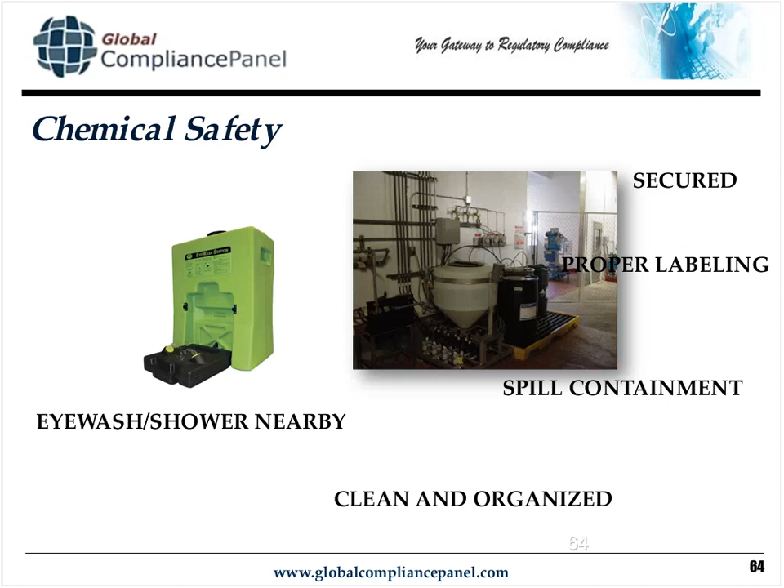Any other protective gear like rubber shoe covers, an eye wash bottle, a face shield if necessary, especially if you're using the acid or one of the more corrosive or toxic chemicals. Gloves at all times, because there's pretty much nothing that's going to kill bacteria that's not going to eventually be harmful to your skin over a long period of use.

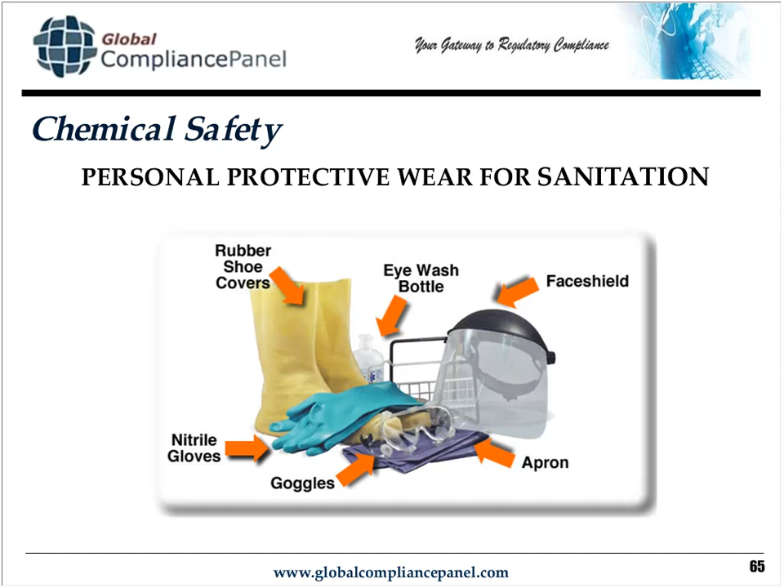Goggles, again, to protect your eyes. We don't want any of what we've mentioned today in our eyes. And again, an apron just to protect your clothing. Some of these chemicals can be corrosive to your clothing as well. You all know the effect of bleach or chlorine on your clothing.

Sometimes facilities will have a dispensing system in the production area. That would be considered unsecured because anyone could remove this, remove the tubing, take the bottle out, and dump that into product and contaminate. And whereas we would think most employees or team members would not want to do that, you may have a disgruntled employee who may take that idea on.

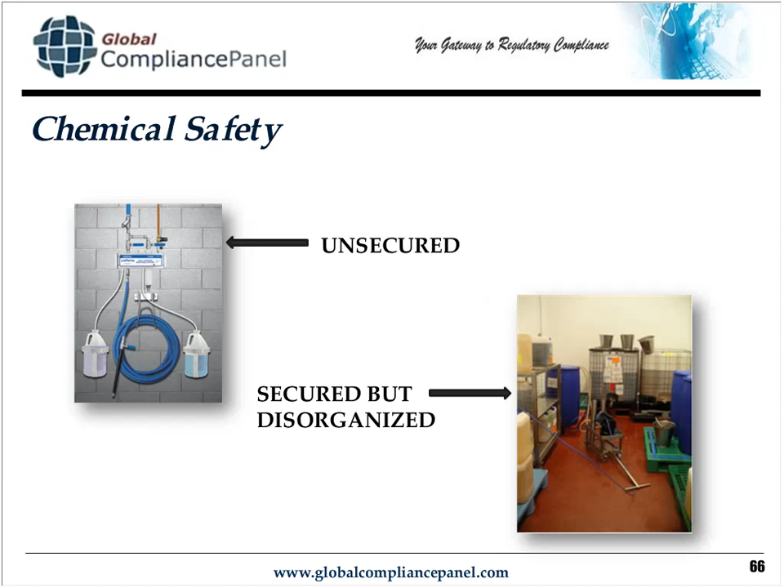In this area, while it is secured in a separate room, it's a little disorganized. We don't want anyone to trip. Again, we've got dangerous chemicals here, and we want to keep employee safety in mind at all times. So we want it to be organized so that we can not only find what we need and use what we're supposed to use, but also so that we don't get harmed in the process.

The Code of Federal Regulations requires that the regulatory agencies such as USDA and FDA have control through the EPA over these chemicals. So they will be defined in terms of their use, and we need to adhere to those determinations.

Again, chemical safety and security, they should be monitored or secured at all times. That means in the sight of the accountable and trained personnel, never stored with product. If they're accessible, they should be diluted to those approved concentrations that we noted, or they should be locked away in a cabinet or room with restricted access only to those personnel who are approved to use them and have been trained as such.

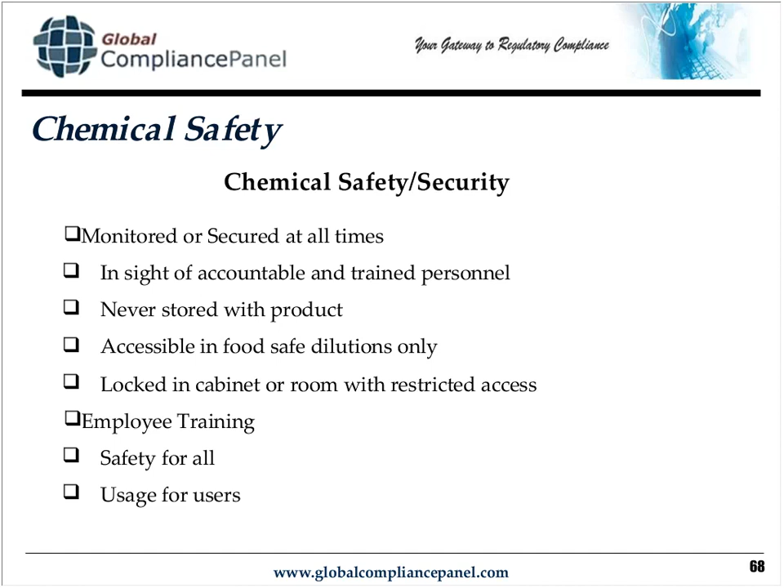Employee training should involve safety and usage as we've gone over today. So this webinar actually constitutes your training for chemical and sanitation training. You'll need additional training to your specific job responsibilities, but you are now knowledgeable about chemical safety and cleaning and sanitation.

Just as a brief review, each surface in the facility has a defined level of cleaning required, be that cleaning or sanitation. Direct food contact surfaces must be sanitized such that microorganisms or bacteria are reduced by 99.999%. 5 steps for effective cleaning are removing debris, applying cleaning chemicals, scrub surfaces, rinse, and then apply sanitizer. Very critical. Chemicals which are not acceptable for food contact dilution must be secured or monitored at all times.

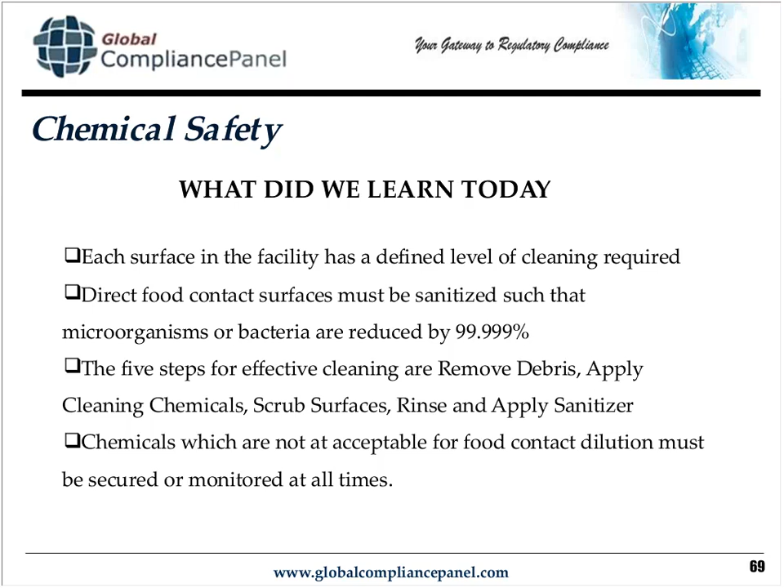Here is a copy of your training acknowledgement. You can take this form, add your company name, write your names here, your title, and sign here, and that is your documentation that you have received this appropriate training for chemical safety and cleaning as you get audited and are asked about this training.